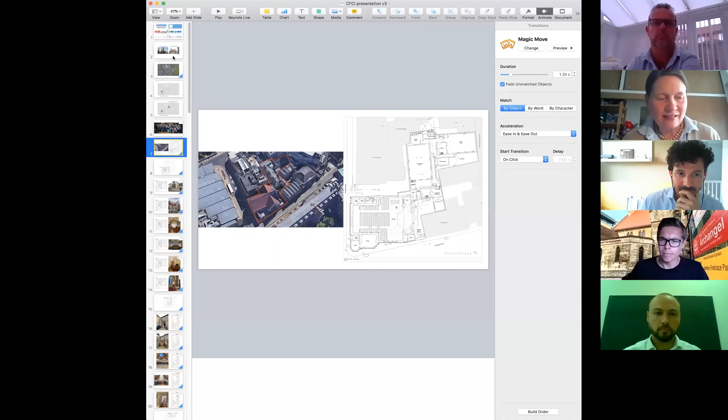Hello, everybody. On behalf of the church building group, I'll highlight 3 aims we've had in mind. The first is a large worship area. We wanted to open this existing area to more people and to consider flexible uses during the week, as well as Sundays. Second is our entrances. We wanted more welcoming spaces, again, both for the church and for weekday community use. And the third point is about sustainability.

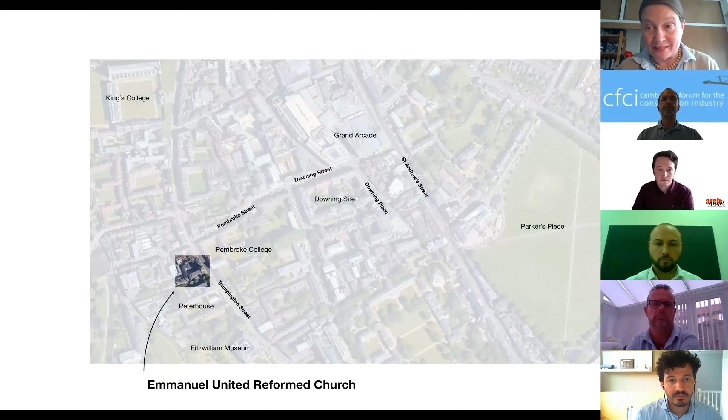First, some background. The redevelopment of the Downing Place United Reformed Church was enabled by the uniting of 2 churches and the selling of one site, that of Emmanuel on Trumpington Street, to Pembroke College. This gave us both the people, and we have 200 members, and the funds to redevelop the other site, formerly St. Columba's, in Downing Place. Pembroke also allowed us to stay in the Emmanuel site for 2 years after the sale during the renovations.

Now, Emmanuel already had the experience of removing the pews in 1991 so that the worship space could be used flexibly 7 days a week, including for weekly concerts. The Downing Place site, which Jack's very conveniently showing here, is opposite John Lewis and has a different community on its doorstep. In fact, it's right on the interface of the university and really busy shopping streets.

St. Columba's had 2 halls that were heavily used, plus the group therapy center, which is now NHS commissioned, all together hosting over 1,000 people a week. The St. Columba's worship area, though, was used only on Sundays and for occasional funerals and concerts. It's quite a striking place and little known.

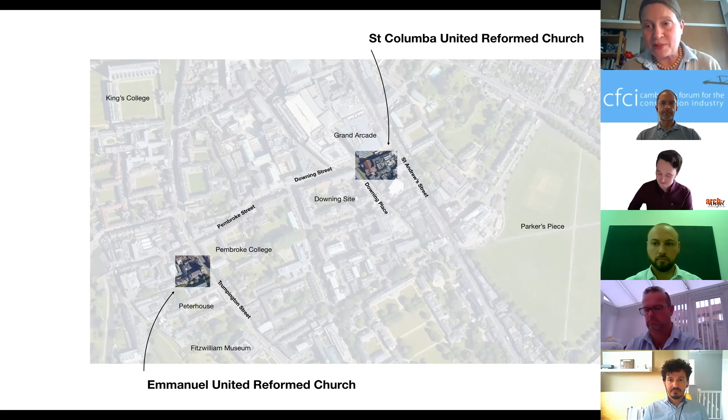So our brief was simple, just update the site for 2050. For worship, we needed this flexible, subdividable sanctuary with a welcoming entrance and including disabled access. For music and concerts, we needed a new digital organ, and we needed to be able to move the grand piano to and from center stage. We needed a catering kitchen for coffee hours and meals, plus a welcoming reception base capable of overseeing the entire site. For community use, we needed small meeting rooms clustered around an open hub, between these two larger meeting spaces. And everything is to have state-of-the-art audiovisual.

Sustainability was another goal right from the start. Because much of the halls and roof have been rebuilt, we've been able to add insulation, low energy windows and doors, as well as roof lights to provide daylight, solar screening, and ventilation in hot weather.

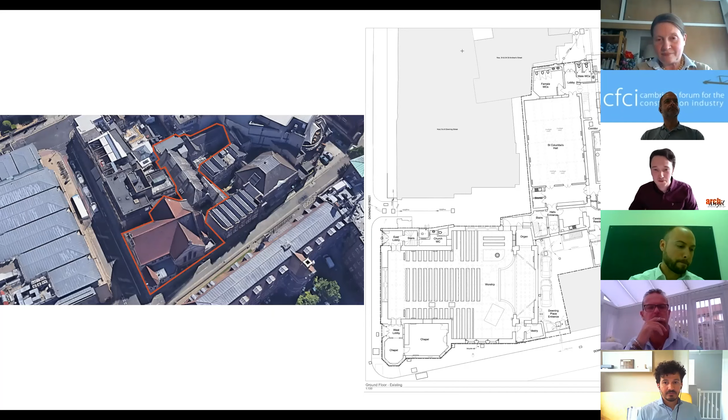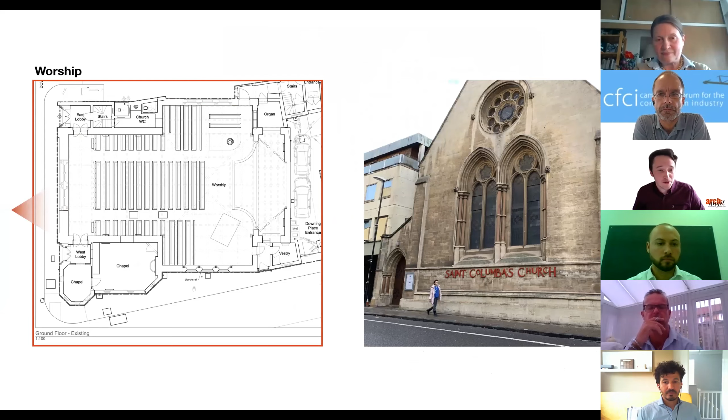The building is not listed. It was constructed in 1890, but it does sit within the Cambridge City Historic Core Conservation Area. We had a positive engagement with a pre-application planning process on this one, and ongoing consultation with the conservation officer throughout the job so far.

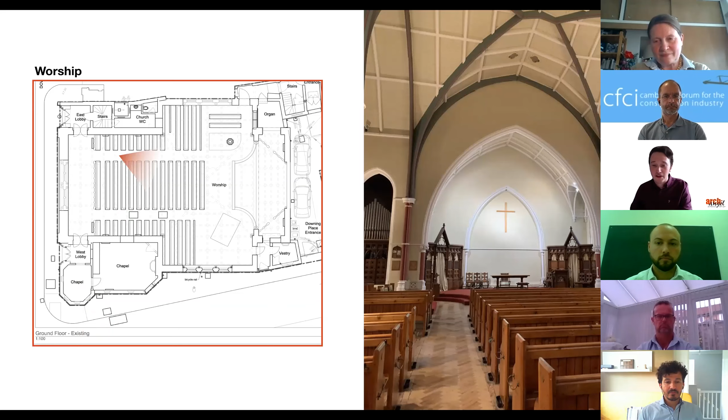We're going to move into the main worship space. As Margaret says, it has a lovely character of its own, and that's retained as much as we're able to do, and what we're changing we'll show you, come on to that later. As Margaret said, it hosts church services, Sundays, midweek, but also funerals, weddings, and some children's activities and student groups—that's how this space is used. But some of the features of the space do get in the way of that being used most efficiently. One of those things being pews, which is something we come across a lot in our work with churches.

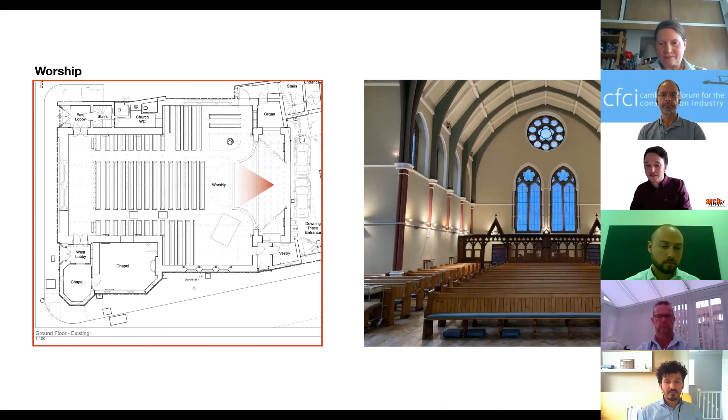The main worship space also has some smaller side chapels. These are used for smaller prayer meetings, and as Margaret said, the Nightlight Service, which runs out of there, caters to people who have been in the pubs and clubs, had a few too many to drink, and they're offered a space to come and sober up and be given some care, whether that be ordering a taxi or just someone to talk to. This space also at the moment, or did, host some anonymous groups as well, counselling groups.

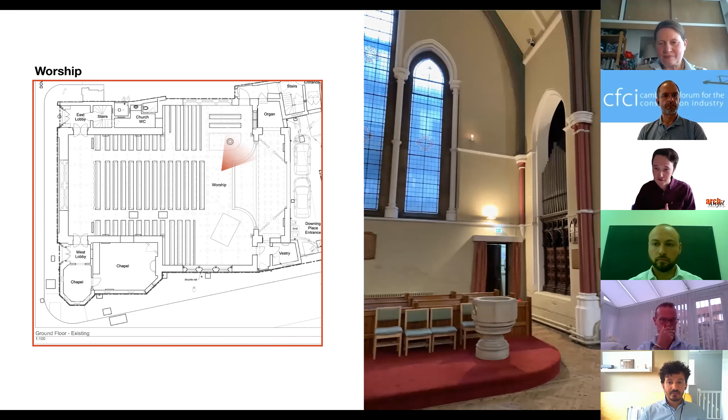Then just looking into the corner of the church, and this highlights one of the main issues we were trying to address in the scheme: the connection between the worship space and the rest of the halls, which was only through that small door there and a small corridor around the back of the organ. You'll see later on how we've tried to address that link.

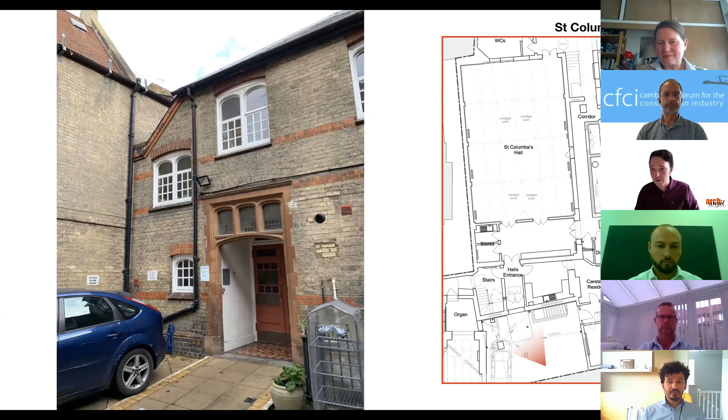So onto the St Columba Hall. This building was a later addition. It has a large hall, WC, offices, and it also has a Caretaker's Flat, you can see on the bottom right. That's nearest the road and the noisier part of the site, which is again something that we looked to address in the scheme. That's just a view of the Caretaker's residence entrance.

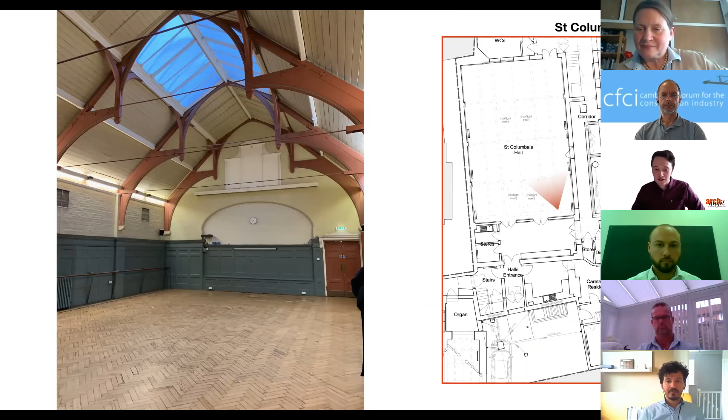This is the view inside St Columba's Hall, and this is used for a variety of things: dance classes, ballet, contemporary dance, yoga classes, martial arts group, and also an Islamic Student Society uses the space for events as well. This is another view looking back towards the main street.

And one of the key problems, and I think this photo highlights it, is that this building was a rabbit warren. It really was difficult to navigate around to know where you were at any given point, and that's another item that we wanted to address with the proposal.

Just through the doors on the left is a small conservatory that sits within a courtyard, which was used for some more anonymous groups, Alcoholics Anonymous being one of many that took place out of that room.

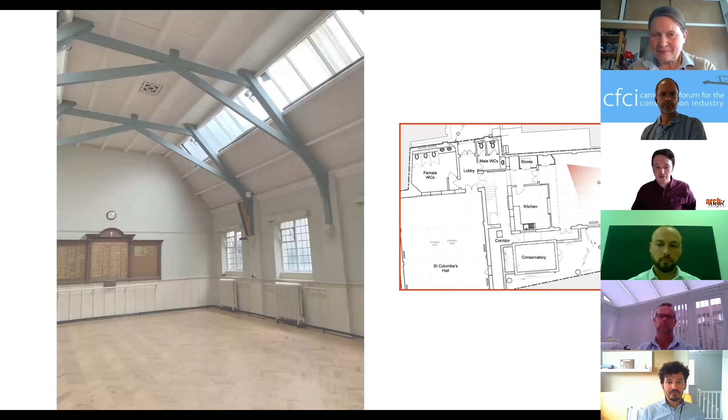And then the third element of the building is the Gibson Hall, which sits in the deepest part of the plan away from the street. It's another large open space. Dance classes were happening here: ballet, tap, swing dance, also a Tai Chi club. This was also used for a monthly lunch club that the church does, providing meals from the adjacent kitchen for a wide variety of people.

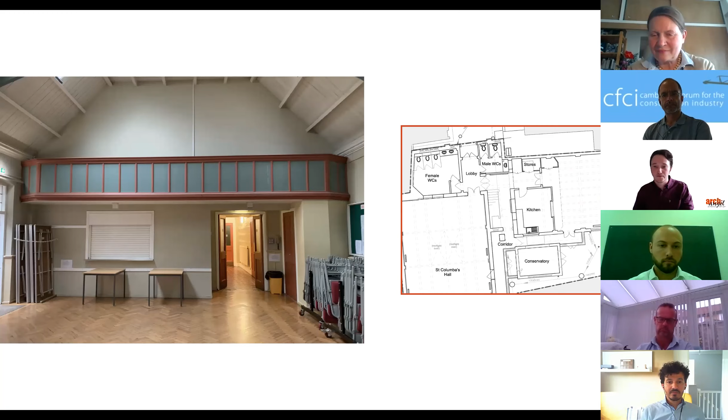And then this is looking back towards the main part of the building. At first floor, we'll come to it in a minute, there are some further rooms. And then this is just a view into the kitchen, to give you an idea of what there is, but hopefully the before and after that I'll come to next shows how we've opened up this space.

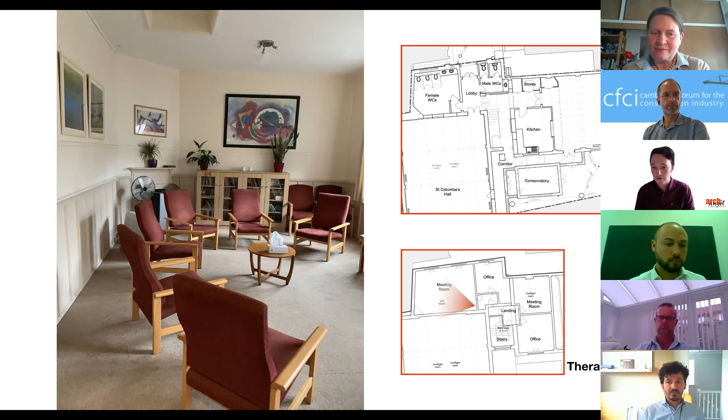And then, as I said earlier, here's the conservatory and courtyard space adjacent to the Gibson Hall. That will become a key point in our scheme. And just briefly, at first floor above the Gibson Hall, there's also a suite of meeting rooms and offices for a therapy centre that Margaret mentioned. So that was something important to be retained in our proposal.

So some of the key aims for the building, as we now come to look at the proposal, we've got 3 examples of change. The first is that the worshipping community are outward facing in their approach. They want to be inclusive and have a very good history of doing that in their activities. But their buildings, as you've hopefully seen, are inward looking. They only have 2 elevations onto the street, so it's very difficult for people to know what's going on inside. That's one of the things we wanted to change, to make the buildings more outward looking.

Second thing we wanted to change was the interconnection of spaces. There's a separation in the plan between the worship space in the bottom left and the hub and the Gibson Hall, St Columba Hall spaces. That's where a lot of activity is happening, but the physical connection between the two was very difficult, and that goes against the church's aims of being welcoming to everyone that comes into their building. It seems like there was a divide between the worship space and everything else.

And then the third thing we wanted to address was providing a better suite of spaces to suit the activities that happen within them. They felt they had too many large spaces and could do with a suite of rooms that were smaller, catering for a greater number of smaller meeting rooms.

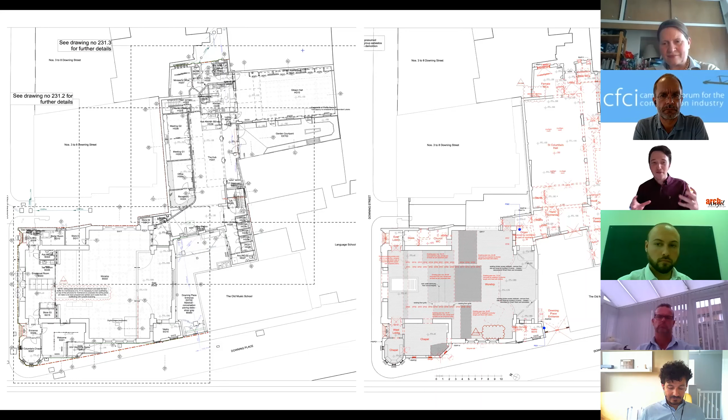So the additions we've made will come through the scheme now. This is a proposed plan on the left and a demolition plan, where you can see that most of the St Columba Hall and Gibson Hall has been reconfigured, and then I'll go through the changes to the rest of the building now. We're going to do that through the use of our 3D model. We model everything in 3D through BIM software called ArchiCAD, from the outset of the design stage, to help with the coordination of all the design stages. So we're going to go through our 3D model now.

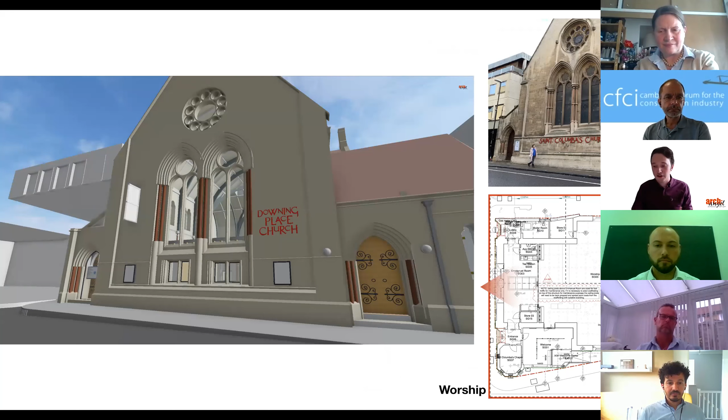And then also on the left-hand side of this image, you may not be able to see it in great detail, but we're creating a shop window, moving some existing doors slightly further back to create space for a TV screen that can advertise events going on in the church.

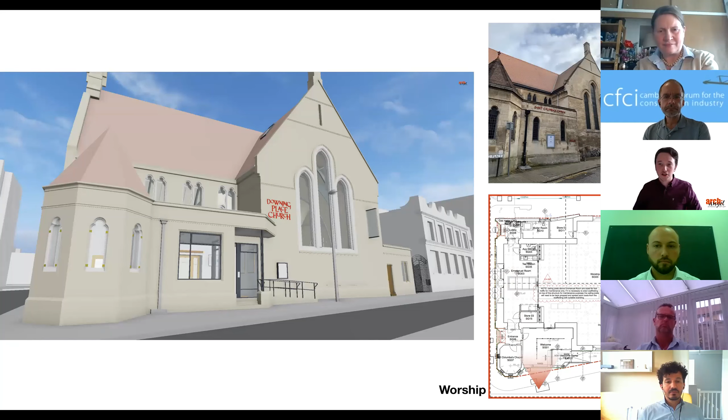Another key change we're making is providing a new entrance. You can see a before and after here. We're creating a new entrance into what was the chapel space, and the idea is to provide a welcoming space that's light, open, and enables people to see in to what's going on in the building.

This is a view from the chapel space, which now becomes that welcoming entrance.

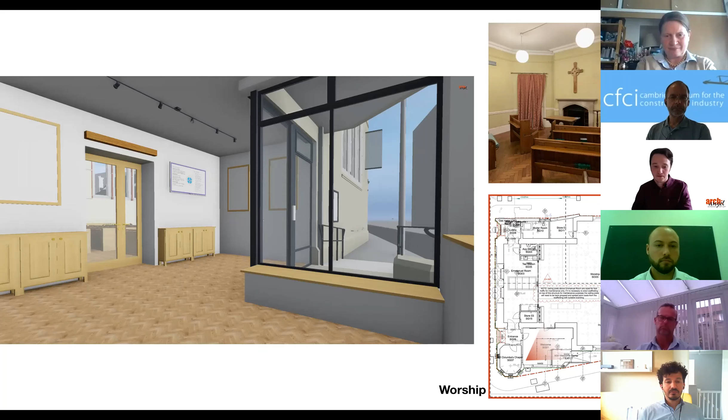Within the church, I think Margaret's covered what the church wanted to do here. They wanted to make it fit for contemporary use, flexible contemporary use. So a full upgrade of the AV and lighting system, and just simple decorations. We didn't want to detract from the character of the space, although you will see some roof lights at high level there, and we'll come on to those later, but that's another key change in this space.

We also, in terms of providing visible activity within the church, have put in a room across the back of the main worship space, which is divisible by a movable glass partition, which you can see stacked on the left-hand side of this image, reusing some of the existing timber screens in front to retain some of the character of the existing building. The idea is that we bring visible activity right up to those new windows on the Downing Street elevation.

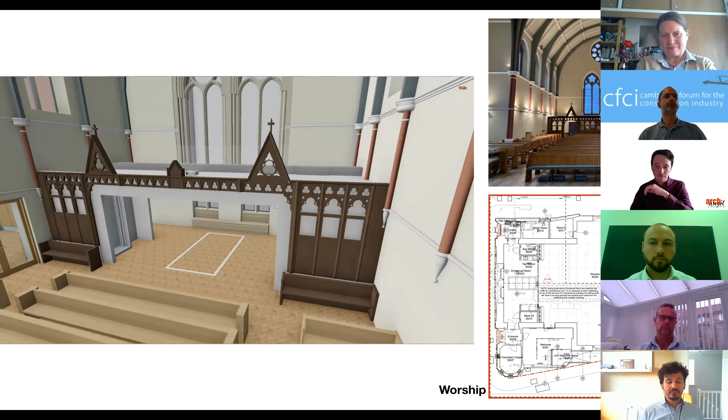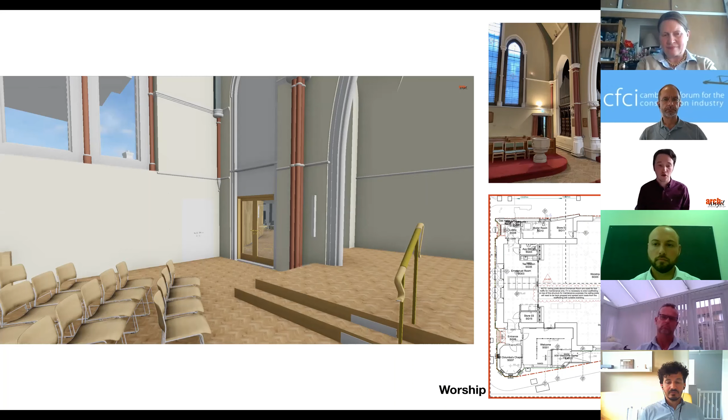And then, looking at the connection between the worship space and everything else, we removed the organ and did some structural alterations to take away a corner of the building to allow a better flow between the worship space and what was the St Columba Hall, now looking at the St Columba Hall, which has been retermed the hub.

This is where we've done the most additional works and alterations: the addition of a mezzanine floor into the hub, into the St Columba space, to create the hub, and a reconfiguring of where functions happen on the plan. So what was the Caretakers Flat now becomes a suite of toilets and the main circulation route, stairs and lift for the building.

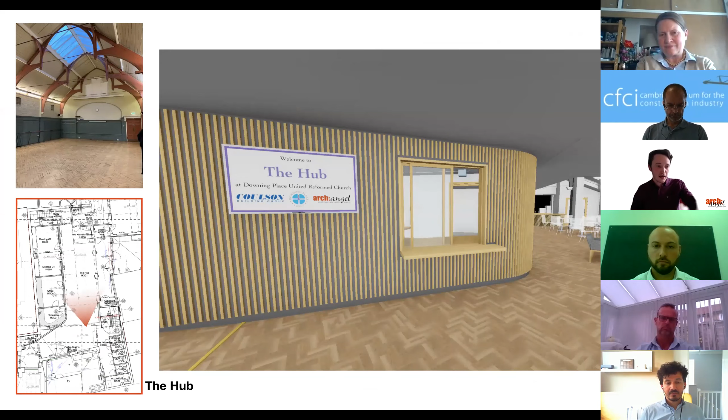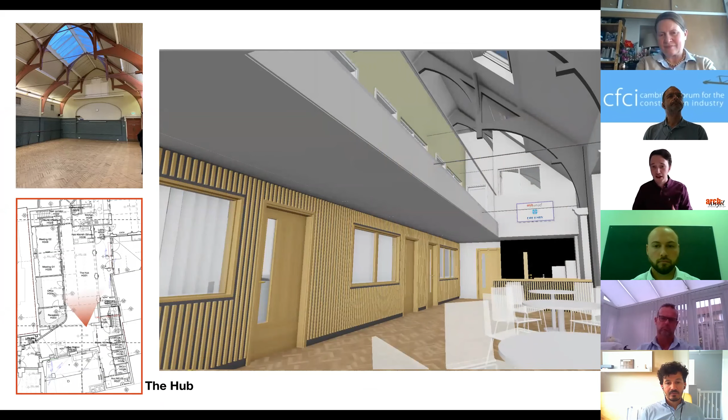So that becomes the entrance to the hub. That's just the same 3D view showing the divisions of meeting rooms. And this is the before and after of the hub, showing that we've added meeting rooms at ground floor - you can see them on the left of the plan - and office spaces, and then an open plan hub space that will be used for tea and coffee after the service, but also as a meeting point for anyone coming into the various uses of the building.

Another view looking back, again, of before and after. And again, opening up of the corridor spaces. The conservatory on the top left, or that corridor we had, we've taken that down, and actually this is the only part of extension on the project, just extending slightly further out to better address the courtyard, and demolition of that conservatory building as well.

As you can see, throughout the scheme, there's lots of use of height, natural light, and roof lights throughout.

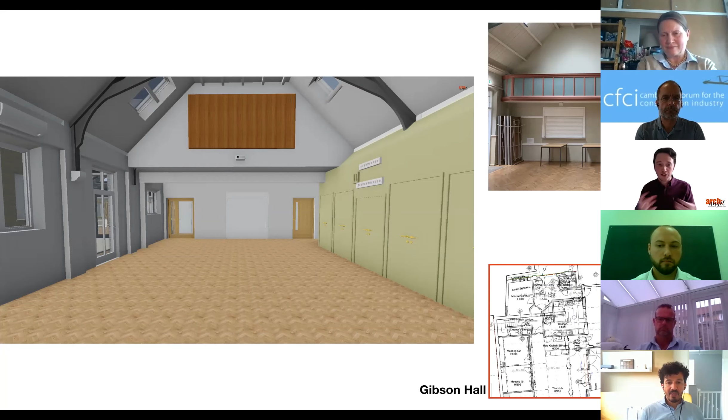And then looking back towards the end of the Gibson Hall, you can see how we've actually pushed the kitchen back in the plan, which enables the kitchen to serve into both the hub and the Gibson Hall, which was one of the key changes in this, and involved a lot of structural changes.

And that's highlighted by this before and after in the kitchen. Where we were in the kitchen, we've now actually extended the Gibson Hall space to make that more usable, but then, as I said, made the kitchen serve into two different spaces.

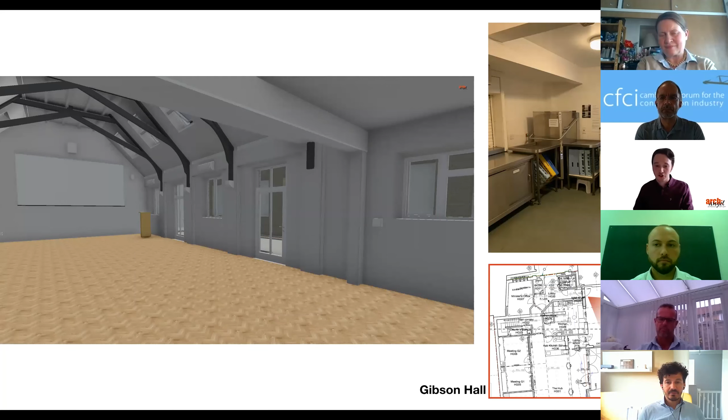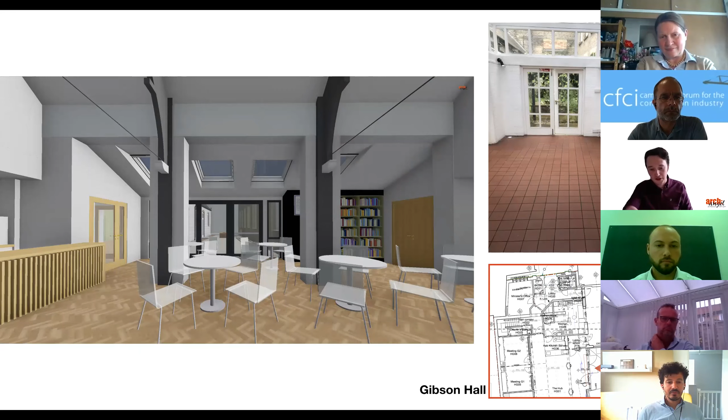I won't dwell too long on the first floor, but we've added a suite of meeting rooms to that mezzanine, and also relocated the therapy centre to the front end of the site.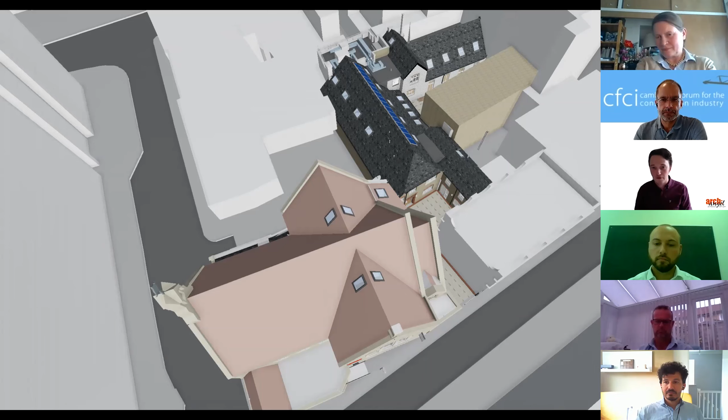That gives you an overview of the changes we've made, and we'll go through some of the other design features as I now hand over to Coulson's to talk us through the build process. One key reason we engaged with Coulson's, in a negotiated contract from a relatively early stage, was driven by the timescales of the sale of Emmanuel to Pembroke. We felt a negotiated contract was a good route because it gave dependable delivery and the contractor's expertise within the design stage. As we developed the technical design for tender, we got input from the contractor on buildability, which I hope has improved the build process for us and for Coulson's. So that's it from me, I'll hand over to Tom and Stuart.

Thanks for that, Jack. We'll now go through the build process. Starting with this aerial shot again, just to remind everyone of the issues we have working in central Cambridge. The first being having 7 neighbouring businesses, which are the Language School, both the Spoons, All Bar One, Wagamama's, the Varsity, Nando's, and Vodka Revs.

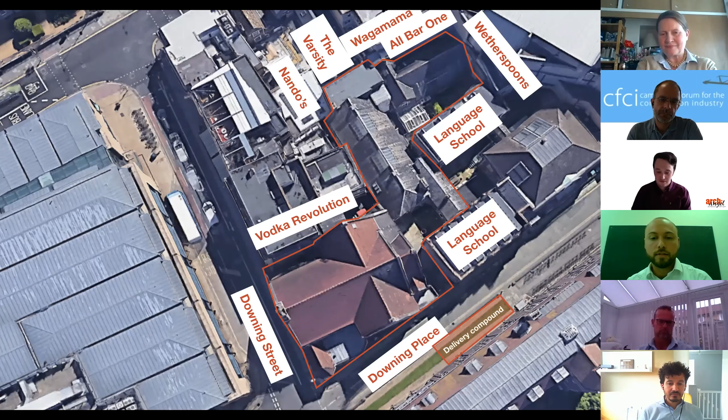With it being in central Cambridge, land is a premium. The church have very good previous experience working with the neighbours and being very accommodating, so we were able to negotiate with Downing College to have a delivery compound set up, and the boxes just appeared like so, which has eased us taking deliveries and moving materials into site.

During the works we've made sure we keep talking to our neighbours with a public liaison officer. The photo on the left is the delivery compound. Within Downing College there's a very sensitive machine the other side of the wall that picks up on vibration and noise, so we put Heras acoustic panels around there to ease the pressure. To the right we have our project notice board, which allows everybody walking past to know what's going on inside the church and what disruption would be caused.

Being at the top of the road, we're obviously going to be blocking it quite a bit to take deliveries, so we set up a delivery schedule where we liaise with our neighbouring businesses, which also allowed anyone who needed to pass down there the ability to know when we're likely to have a delivery truck blocking the road, so they can plan their journeys around it.

As well as getting materials into site, getting materials out is also a bit of a headache. We had a little compound area, made even smaller by putting a scaffold in there as well. We had to go out to several different skip companies to finally find one with a truck small enough to back a lorry in there. As you can see, Cambridge Recycling was successful with this one.

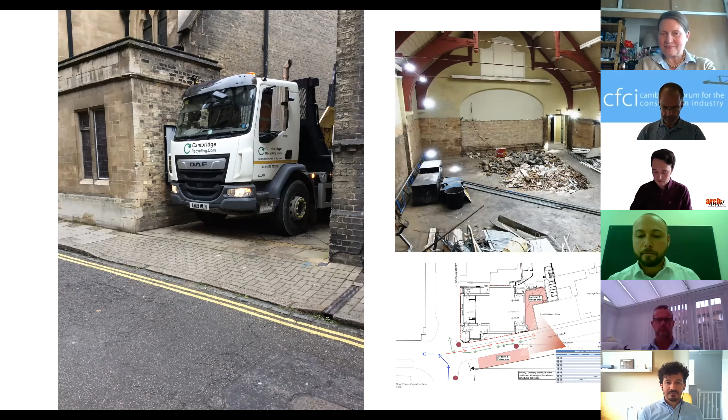But what we did have is an abundance of internal space, so we were able to use the hall, that's St Columba's Hall there, to do site segregation, so all the waste was sent out in the appropriate skip. Next slide.

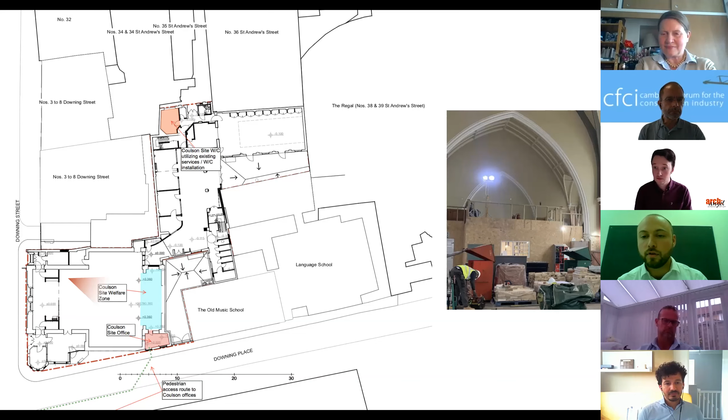Welfare was also something we had to rethink how we were going to deliver, with not much external space, so we decided we would use the inside of the church. The existing dais proved a good location. As you can see in the photo on the right, we had a timber frame hut constructed which had the canteen, a meeting room and the site manager's office, which also had an external door, so everyone can safely enter site without having to go through the building itself.

Thank you, Stuart. Hi, good afternoon everybody, Tom from Coulson speaking. In addition to what everybody said, there's the issue of getting people in and around the site. Clearly we're exposed on two sides to public highways.

We chose to register the contract with the local scheme, the Considerate Contractor scheme based in Cambridge. We work well with these guys, we've worked with them in the past and have a one-to-one relationship with Mr Nick Kendall within there. That gives us the opportunity to pull on that local knowledge and assist us in agreeing and maintaining footpath closures, delivery routes to and from the site, all of which we of course take on and agree through highways.

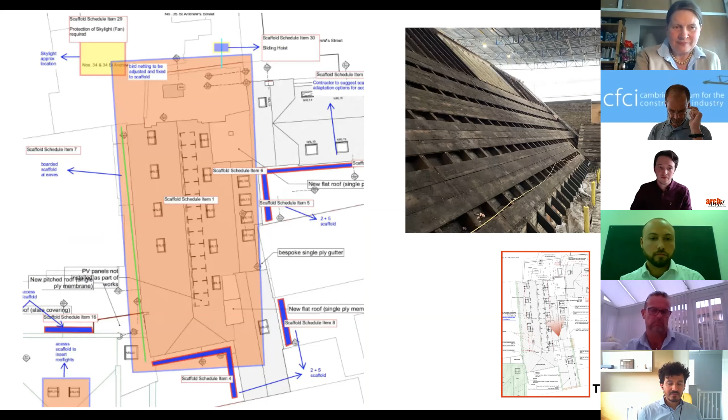Okay, following the erection of the temporary roof, that allows us to actually progress the project. Clearly, on most projects, you start at the top and work your way down. This one is no change there. So one of the first things we did is strip the roof to the Gibson Hall. You can see here the roof is stripped back to its bare bones, nothing but a sarking board and rafter left. That gave us access to removal of the existing roof lights, which have been replaced with modern ones. 28 roof lights in total installed across the scheme.

Removing the existing roof coverings, like you can see here, gives us the ability to improve thermal efficiencies of the building. Margaret's touched on that earlier, so you'll see through later photographs what we've done ensuring we meet that client brief.

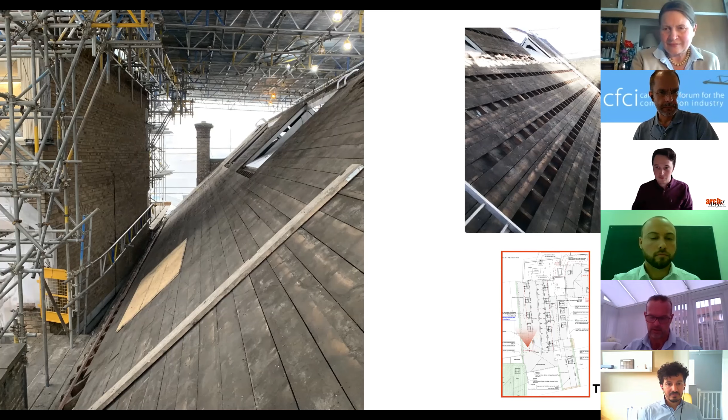This is back to me. This is just highlighting that we had various different roof constructions found, and in one case slightly unexpected. So we had to have a very specific strategy for each type of roof. Some of them needed ventilation, some of them didn't. But in everything that we were trying to achieve, we were looking to go 10% beyond the thermal improvement required by building regs, required by Part L for working with existing buildings. So yeah, this was just highlighting that each roof was treated slightly differently.

To ensure that we got the best thermal performance possible. And while we were doing works to the roofs, as Tom said, introducing roof lights throughout, and also taking the opportunity to install PVs along the St. Columba roof.

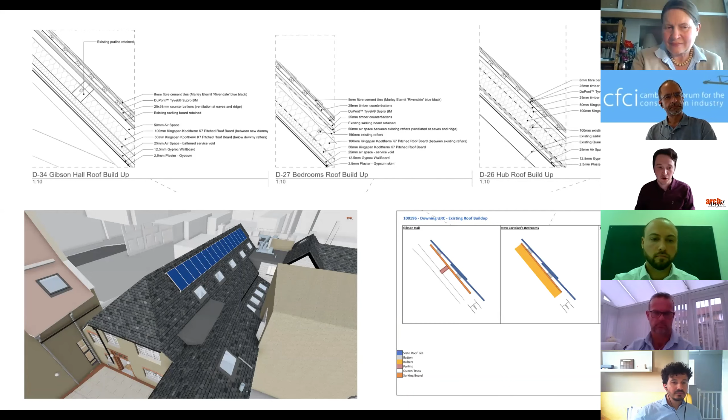And just following on, this slide highlights the strategies that we took. So part of the reason for putting in so many roof lights was not only natural light, but also natural ventilation. Each of the roof lights has rain and CO2 sensors, so they can close automatically when either condition triggers it, but in the main they can be left open to night purge of heat that's built up throughout the day, which was a problem that the client had experienced in the past. So that's the strategy throughout the building.

Thank you, Jack. As we suggested earlier, here we can see the same roof that we previously witnessed stripped. It's now well underway through and being improved. The roof lights you can see positioned here. Note the positioning of them. Two of them had to be raised slightly to allow flashings on those to be considered when abutting existing roofs.

This is the type of detail that unfolds as we deliver these refurbishment projects. You can witness again here the insulation cut between rafter and then another over, all held down with a counter batten. And again, in the top right photograph there, you can see how Coulson's have worked sympathetically with the building.

There's areas of existing lime plaster lath retained there. This is all done in an attempt to ensure that the building is respected and we don't just go in there and take the thing apart, as it were. Thank you.

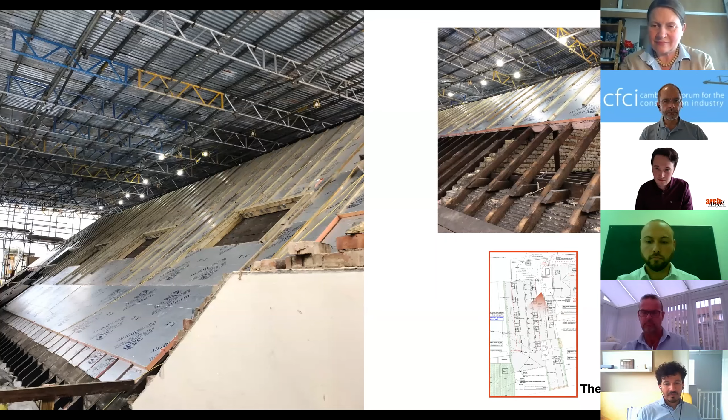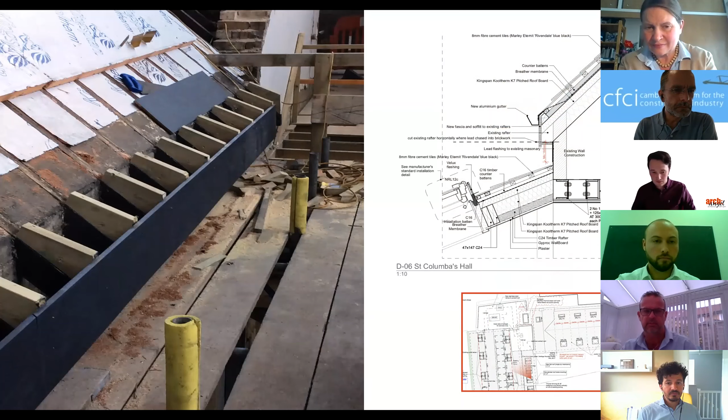As we rebuild these roofs and include the thermal efficiencies, very often that suggests an increase in height. Clearly, if we take things up, existing structures end up being compromised slightly. So here we can witness an extension to rafter feet through the sprocket, a slightly deeper fascia that allows us to incorporate that insulation build-up seamlessly, really, and respects the architectural intent. So that allows us to do what we've got to do.

In addition to that, when working again with these old and historic buildings, there's many abutments that we come across that need some serious consideration. What we're looking at here is a reworked version of the same through Colson's. This particular gutter created no end of problems for the end user prior to our attendance, through regular overflowing and very difficult to maintain. Access really is quite difficult here.

So we removed the gutter in its entirety, reformed it, being compliant through lead code in steps and so on, increased the layboard up the roof to mitigate the overflow, and we've incorporated an overflow system within that gutter, so the site will get witness of a potential block in the main gutter prior to water penetration into the hall.

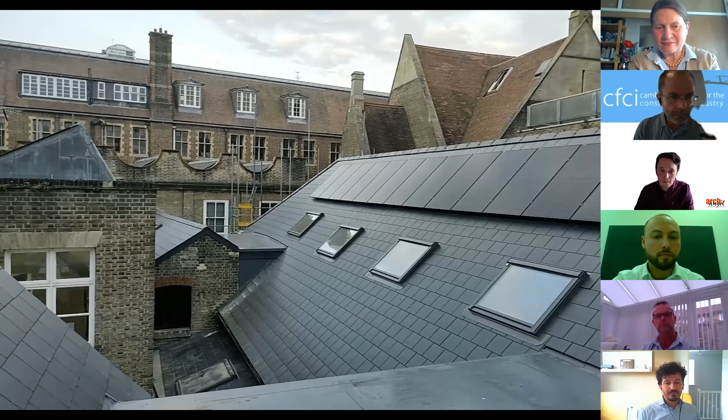This is a picture taken only a couple of weeks ago, showing a temporary roof that's now been struck, and obviously we're left with the solar panels, all the roof lights, the new slated roof, and the merge of some recently installed flat roofs as well.

Once a roof is completed and stripped, we take some of the load off the building. Once we've stripped the roof, that allows us to consider the many structural alterations that are needed.

Jack put up a plan earlier on with several areas of red within it. All of that is demolition. And what we're starting to see here is the progression of the demolition through the scheme.

Several high-level windows have been opened up. You can see three to the right of this photograph. They were high-level windows - we've basically removed them, made them slightly wider through large metal steelworks, and then opened them up in their entirety to get that natural light back into the building.

Back in the far left-hand side, you can see another pair of steels there. That's an entire corner removal, which does take an element of skill, that's for sure. On to the next one, Jack.

This just highlights the other end of the hub hall, really, as we're about to open up the first floor structure to connect the therapy area and the new lift into what will be the hub zone.

Next slide. And then this is in the Gibson Hall. This was a bit of a complex rework, really, for raising the floor.

We had to do a cantilever mezzanine structure in this section, as there was a basement beneath where, if we were to put normal foundations in, it would be quite large, which would mean digging a 2.3 metre deep hole in the existing building - quite challenging.

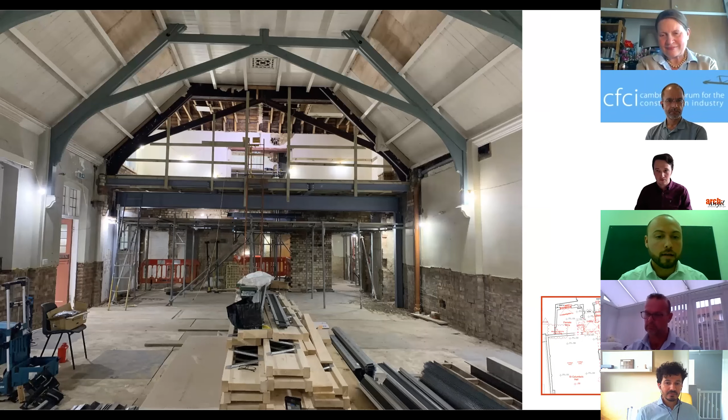Next slide. Here again, more steelwork - there is plenty in this particular project. What we're looking at here is the progression of the mezzanine structure within the Columba's Hall. Interestingly, this structure is completely independent, with some strategically placed columns that are later concealed within walling, foundations underneath breaking through the existing structure onto a pad foundation, and then a simple timber joist infill between.

All this work was done with the use of MEWPs, so there was no risk of fall. Everything was erected and the timber joists were installed using mobile elevated working platforms, as it were.

To the right, you can see a nice photo there illustrating quite nicely Jack's 3D model. And this 3D model really has been very useful, certainly at site level for the site managers. They're able to witness and appreciate the intent, which is often very difficult when you're looking at things 2D in a large open space. So that 3D model for us here at Colson's, we can't praise enough - it really has been very, very useful.

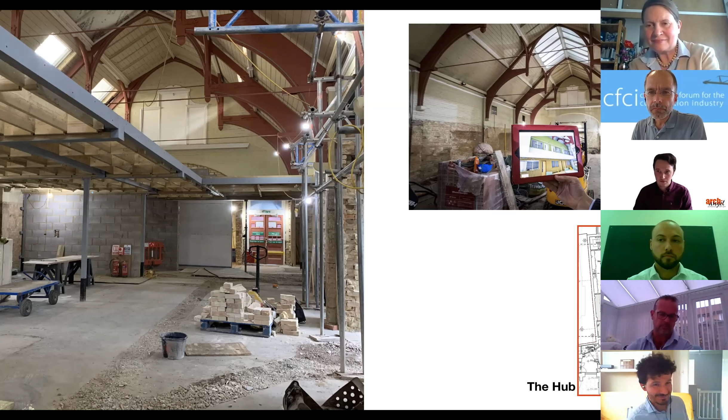We're a bit worried about the steadiness of that whilst we took the roof out, and it being an unsupported roof structure. So in turn, we decided we would install the new roof first. As you can see, the joists have gone in there, and then we put the ply deck on, which in turn acted as a bit of a crash deck, as well as keeping the site nice and secure and the elements out whilst we took the roof off.

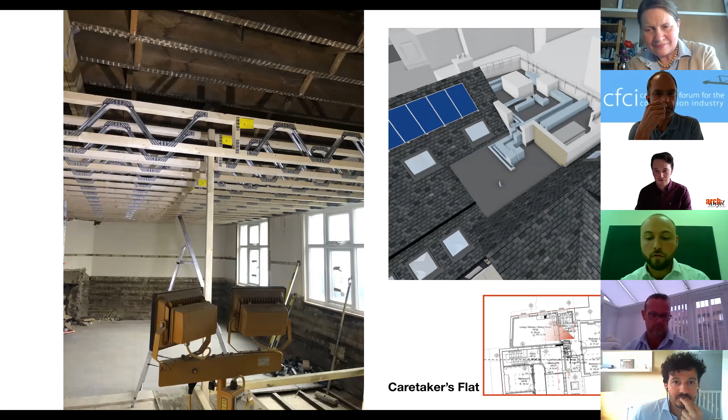So, as Stuart mentioned, lots of plant placed on a flat roof, and we then had to, at design stage, work out how to feed that plant throughout the building. We've basically identified a longitudinal route all the way along the spine of the building at two levels.

This is showing ventilation coming in from the flat roof behind us, going through at high level, carrying on above the first floor meeting rooms, and branching off to the right, then dropping down through the first floor meeting rooms to get to the ground floor meeting rooms. This was something we worked on at design stage, making use of the BIM model with our services engineer to identify those routes to service the building.

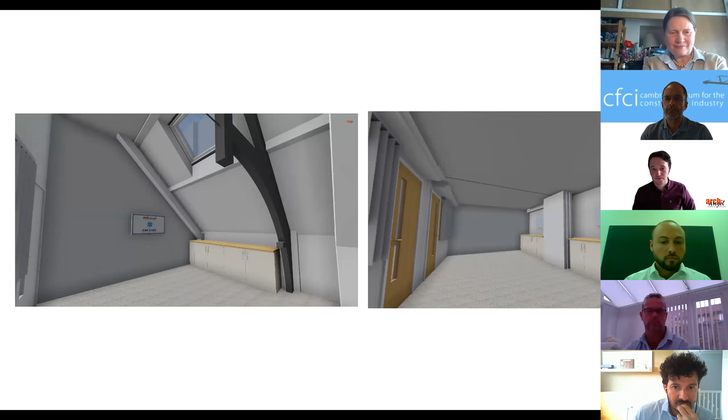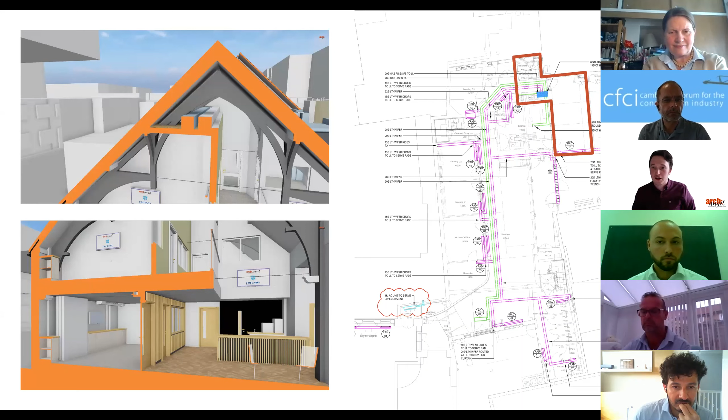This is another slide that represents the same thing. You can see in red the plant area that Stuart was talking about, which feeds the rest of the building through a riser identified in blue. The pink and green basically show the service routes we've taken, going all the way along the spine of the building, which runs at both first floor ceiling level and second floor ceiling level. Which brings us to where we are in the hub now.

Yeah, indeed, thank you Jack. What we're witnessing here is exactly one of these primary service routes. This one runs front to back of the building, and you can see the high level containment for electric, data, AV, fire alarm.

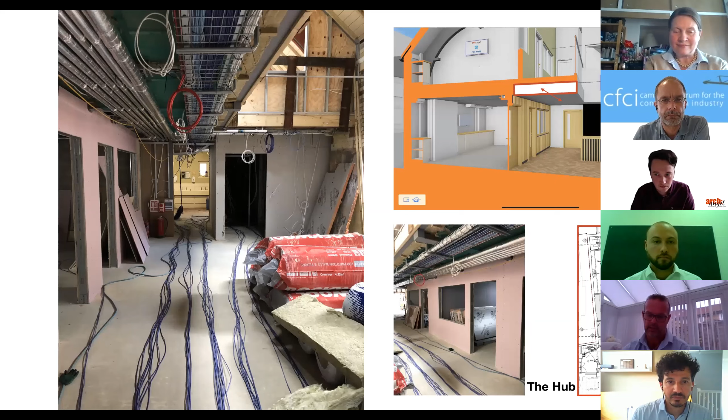Next one, Jack. So we've just jumped straight up above to the first floor now, where we can see the meeting rooms starting to be built. These walls are acoustic walls, and they also run slightly higher than the ceiling will be, so they mask the ventilation ducts that run across, while still maintaining the nice structure of the existing roof. We can see also in this photo how the light is going to work, making a nice light, airy space between the ground and first floor areas.

What we also wanted to pick on is the existing ties. On the right hand side within the Queen Truss, you can see there's a light grey scar - that's where the tie used to run. As you can see, that would have been right in the way of the walkways and meeting rooms. So we've actually lowered this tie down, using the existing steel and the new steel frame structure we put in, connecting to the existing piers we've now formed.

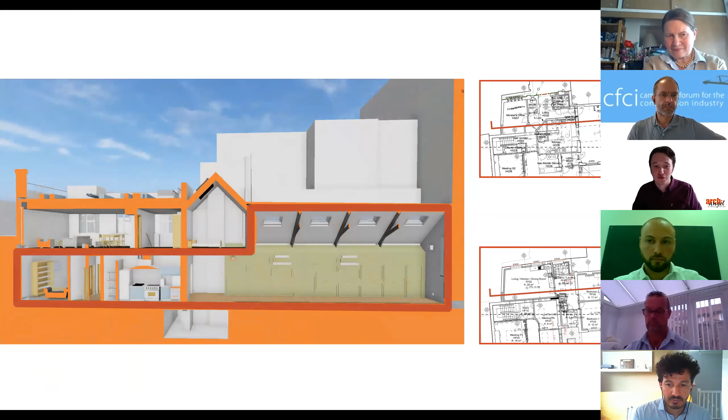I guess, over to, I think it's Tom. Yes, indeed, thank you Jack. So as Jack has suggested there, we can witness the progression of the acoustic floor, and clearly the acoustic flooring is quite important when we're working above a commercial space. So a Gyproc silent floor system was specified.

In addition to that, picking up on the thermal efficiencies that Margaret requested through the brief, you can see again in the domestic part of the building, we've improved the thermal efficiencies of the building with the wall boarding you can witness on the right-hand side.

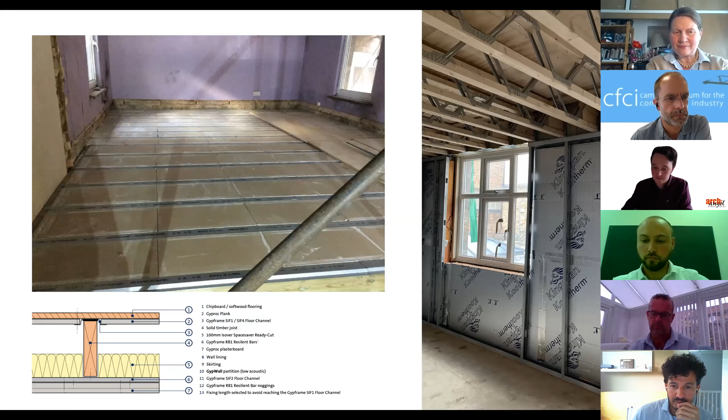Next, we come over to probably the tightest area of the project. This is the lift and stairwell, within the central core of the building, the circulation area if you like. It really is very, very tight, working with the restraints of an existing building, having to get compliant requirements in. Stairs have to be a minimum width to service a certain amount of people, and likewise with the lift, those restraints set limits we have to work with. The stair and the lift was particularly challenging on this one, but I believe we're there.

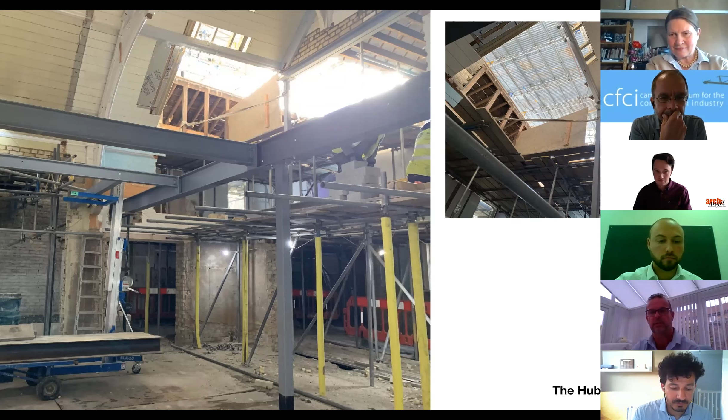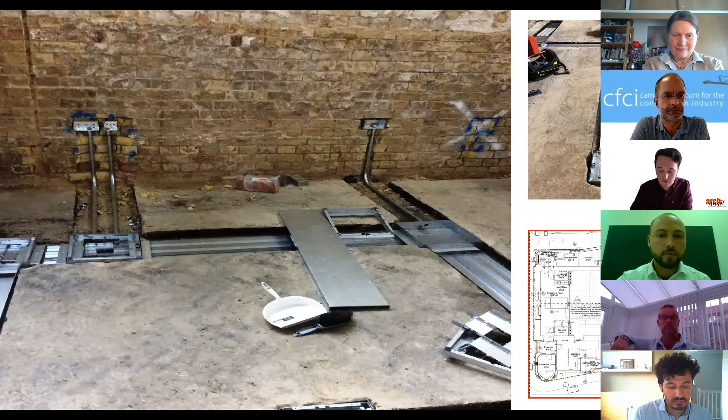We're now just going to touch on a few areas of improvements within the church itself. We've installed lots of floor containment to allow services to pass around the church. Interestingly, this containment only needs a 70mm deep trench, and it's 3 compartmental segregation with that.

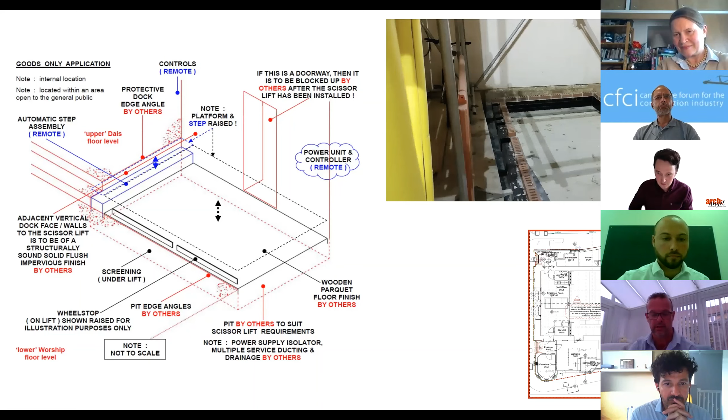And a drawing confirming how this thing will be installed. That will quite simply allow the piano to be slid onto a deck, which will be finished identical to the floor, and then through operation that lift will raise it to the dais height, allowing 2-3 individuals just to maneuver the piano into the center of the dais.

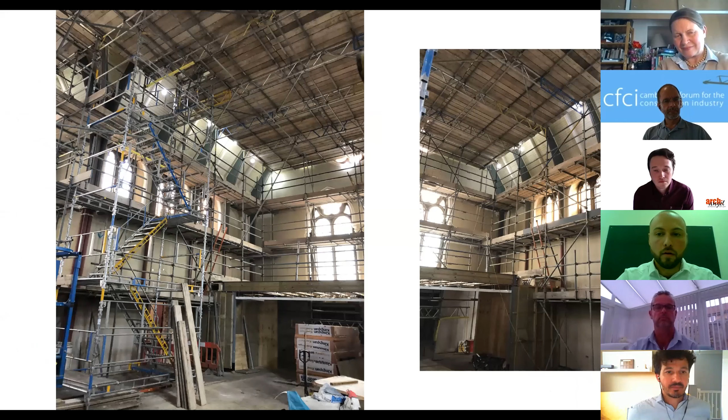To allow us to safely complete the works within the church, we worked with our scaffolders to design a scaffolding run around the perimeter, allowing us still to have the internal floor space. We then did ladder beams across the top to create a platform to work within the high-level roof space, which will allow us to do all the electrics, AV and full decorations, as well as the roof lights and blown insulation.

Just a couple of photos here, really to see the craftsmanship from 1890. As you can see, they used trees to support the roof back then, large, very large timbers up there.

I think this is back to me, just to summarise where we're going with the main worship space and the key environmental things we wanted to achieve, which is actually a reflection of what we're doing throughout the project. So insulating the roofs to give it a nice warm hat on the building. We've also been doing some damp proofing works to the walls, which we didn't mention, but we've done throughout as well. So that's getting nice dry boots - dry boots, warm hat, to keep everyone safe and dry. There's really important focus on providing natural light, providing ventilation through roof lights, providing secondary glazing, or in some cases in the rest of the building we're providing new windows, triple glazed in some cases, and then also the addition of PV panels.

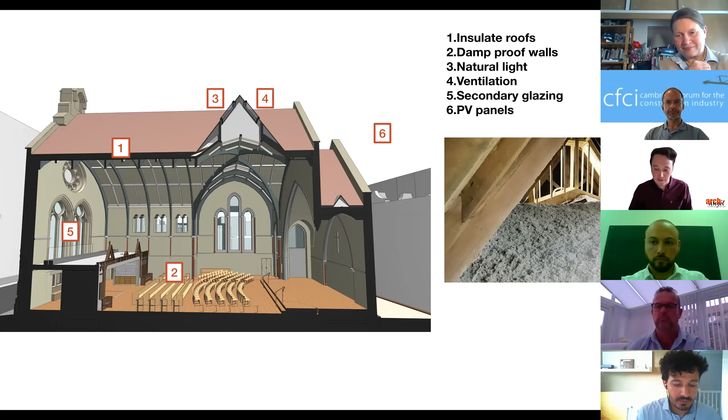The blown insulation to the roof in the image on the right has gone in, into the void space in the loft, and that's a new one for us, something that we think is going to make a big difference in this space, and it shows what is possible with a historic building.

The next phase of work is to open up the new entrance, and there's a real effort here to retain as much existing stonework as possible. Wary that we're running out of time, I think I will say thank you very much, and are there any questions?

Super, everyone, well that's a fantastic tour there. The construction photos, I should say, are absolutely fantastic for our CFCI members to see how all of this stuff goes together, and it's great to see Coulson's giving us a real insight into how some of the ideas that the architect and the team have come to life.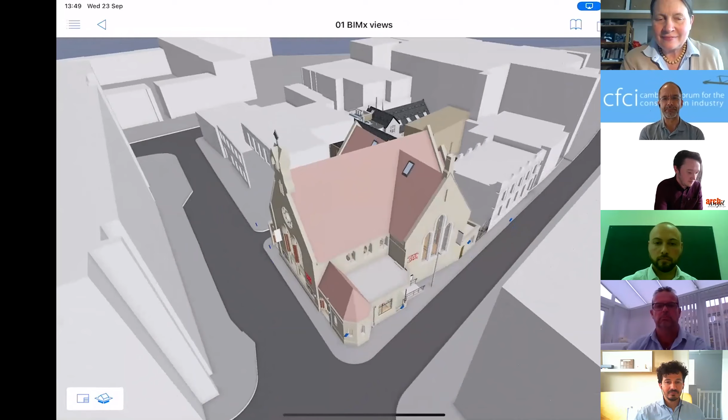I should probably start by saying the challenges of working with an existing building are obviously evident from your talk, and I guess from a climate emergency point of view, we do have to reuse buildings. It just so happens in this instance there was no other option really in terms of conservation, but it does show us how inventive you can be with existing buildings, and perhaps we should all challenge ourselves in terms of the demolition case. But anyway, that's enough of a plea from the CFCI chairman.

So if I can just start directing a few questions to our panelists. It's great to see the 3D modeling of the building, and I've got two questions around that use of 3D. The first question is for Jack and for Margaret: how did the 3D model help the client briefing process, allowing others from the congregation and the client group to understand what was being proposed and fully comprehend how that was embraced? So why don't we answer that one first, Jack, Margaret, or Dirk?

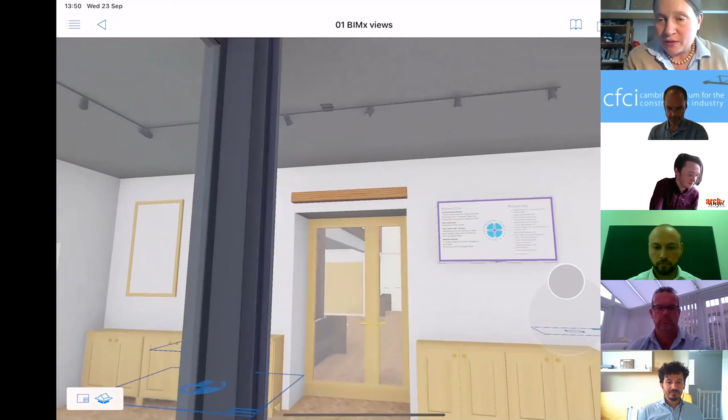I'll start. When we had the big vote to confirm that we wanted to go ahead and agree the funding, we showed Jack's model with a walkthrough, and people were amazed. It was completely clear to people what this huge challenge was and how exciting it was going to be. Right the way through in meetings, we've discussed where the furniture is going to go, what it looks like as you come in, and where the AV panels are going to be. It's absolutely invaluable, and hearty congratulations to Jack - it was really great.

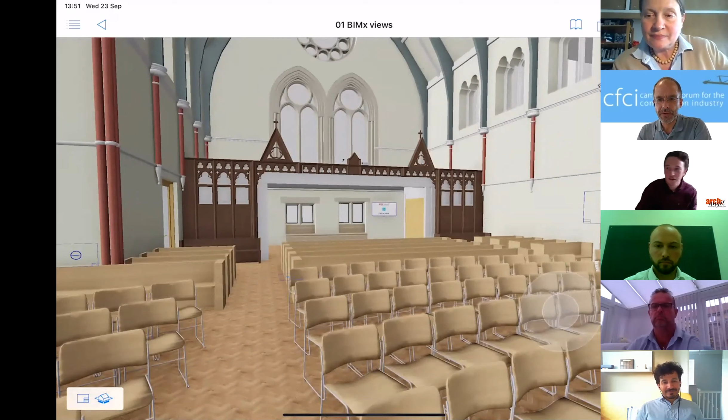Something to add is this model is viewable on mobile devices. I'm running it off an iPad, so it's possible to look at it on site, and we've been able to share it with Coulson's. We can also export it to a basic VR software, the Google Cardboard one, and we did a session with the client group using a VR headset, standing in the space and looking around. It's difficult to show that in a webinar, but it has that functionality. In building group meetings we've run the models too to make decisions - it's useful right through the whole job.

I think it's a super example of how, as a construction industry, we can broaden our reach - bigger picture in terms of making people understand what it is we do, and the vision involved.

Thank you both for that. So my next question is for the Coulson group, Tom and Stuart. As I said at the beginning, the construction photos were really great for us to see, and I love the quote, the needleless propping - I guess nobody else really understands what you mean by that, but it's a great word.

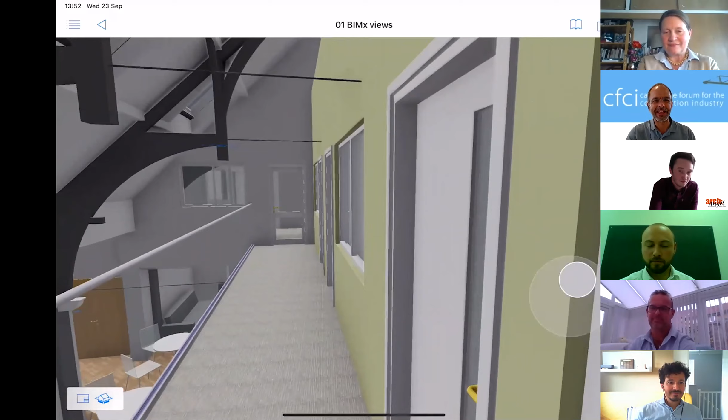On the strategy for construction access, you mentioned there was a sensitive piece of equipment next door in Downing College, in the geology department. So did you upset them with vibration and noise, or did you manage to achieve the considerate contractor points there?

Well, the project as a whole, we've not had a single complaint really. We set up a project-specific email account, noted for anyone passing by if they had any issues, and several of us monitor that. It's empty, so that can only be good news.

Excellent. I guess with seven neighbours, I'm surprised you haven't got any complaints - is there still time yet to get some? I shouldn't say that, should I? There's always still time, Simon, but the public liaison officer we've appointed to the project is regularly communicating with the neighbouring properties, so we can fend off any issues before they become reality. It also allows us to advise neighbouring properties where we are and what we're about to do, so the risk of offence is taken away before the chance is there.

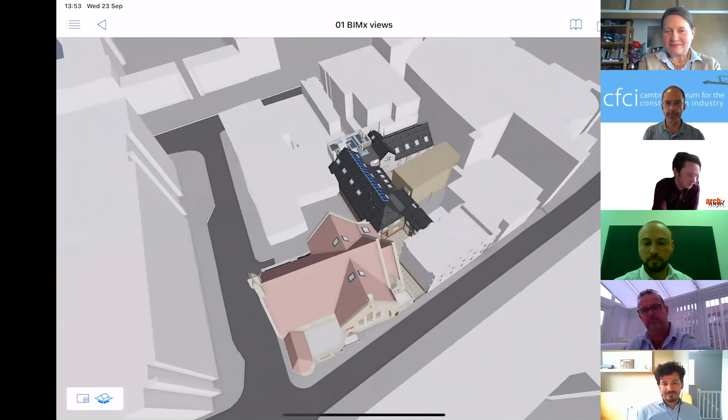Okay, good, thank you everyone. Going back a bit now, a question on the 3D model - how was that produced? Did you do a 3D point cloud survey, or was it all measured by Jack, Apost and Dirk going around making their own measurements? What did you do there, how did you create that?

Apost, do you want to take this one? Everyone's heard enough. Yes, yes.

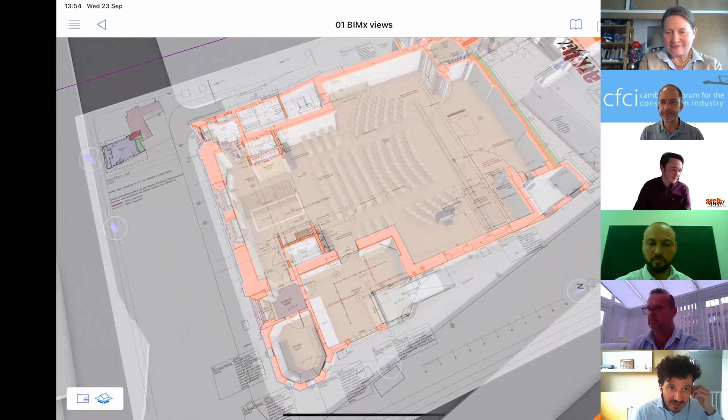So it was a fairly traditional route, I'd guess. The building was surveyed by a surveyor who produced 2D plans, sections and elevations, and we used that to model it with the standard tools provided within CAD software, like walls, slabs, and columns. Through ArchiCAD we get the opportunity to define which elements are retained, demolished, or new, giving flexibility to check how the design affects the building and where you need to incorporate something or not. But it's a fairly simple model building process.

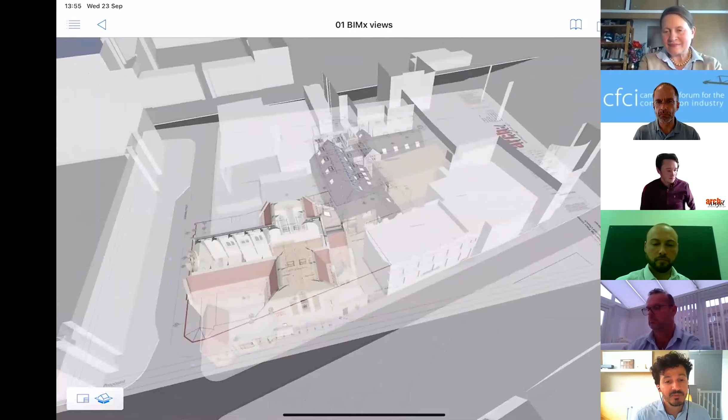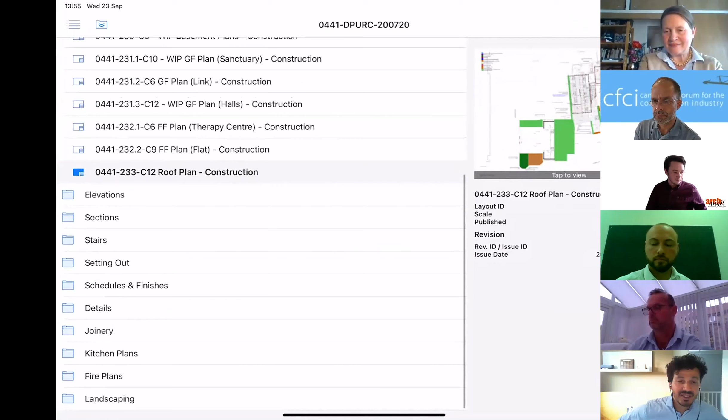The helpful item is that once items are in, production of schedules like furniture schedules, sanitary ware, or room finish data sheets is fairly straightforward and streamlined. So any slight change can easily be reflected in documentation that goes out, which mitigates a bit of risk in communicating changes. Thank you, Apas.

Question here, I think, for Margaret. Was there a tension between the need to remodel spaces to achieve flexibility against the loss of, I guess, a sacred side chapel, which now becomes an entrance? How did you go about making those difficult decisions?

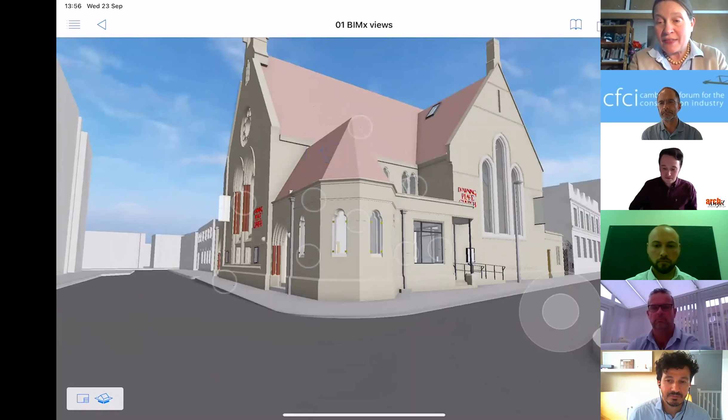For the entrance, it was actually in a meeting - we had a lot of very open, creative meetings. One of the members said, what about coming in through the old chapel? Surely that's the obvious place because it's quieter on Downing Place. So that was not a problem. The pews and all of the carved wood screens - I mean, we're talking about two different congregations.

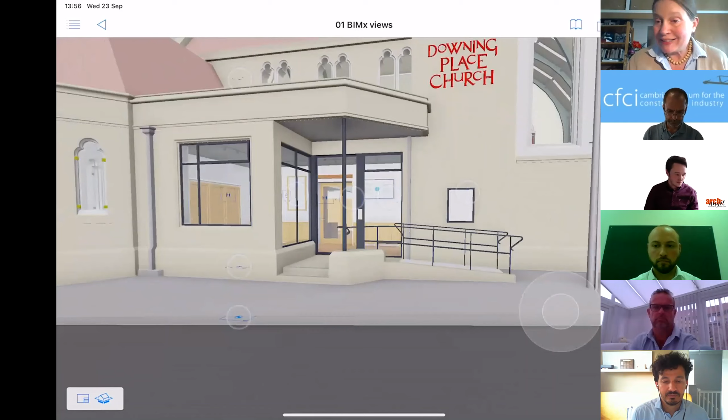Everybody has an opinion, and we simply left it and gave people a lot of time to think and use the 3D model to see what could be. And when we had a vote, it turned out people were prepared to change things. We didn't know until last spring that would happen.

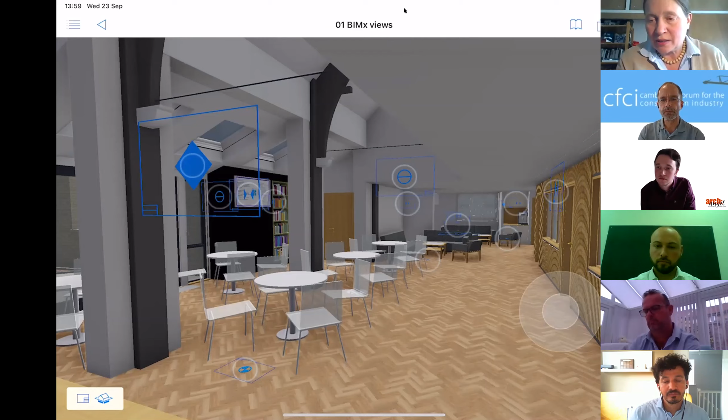From a sustainable point of view, we did hope it might be possible to use heat pump technology. We had no space for boreholes, and it was going to be a problem with noise with all those neighbors. So we do have cooling cassettes - we've got heat pumps in terms of cooling available for really hot weather when there are a lot of people. But that's all we've had to use, gas condensing boilers.

I also want to add that we had really long discussions about whether it would be possible to use air source heat pumps, for example, or any other less emissive mode of heating. It's always an issue with noise, and an issue with heat being expelled out of the units and getting back into the building through the ventilation. It was very difficult to accommodate that in this case. And we weren't able to, for instance, lift the floors and put in underfloor heating. The amount of thermal insulation was good, but couldn't be enormous given the constraints of planning and the existing building structure.

Sorry about that, the doorbell rings, doesn't it, when you're in the middle of things.

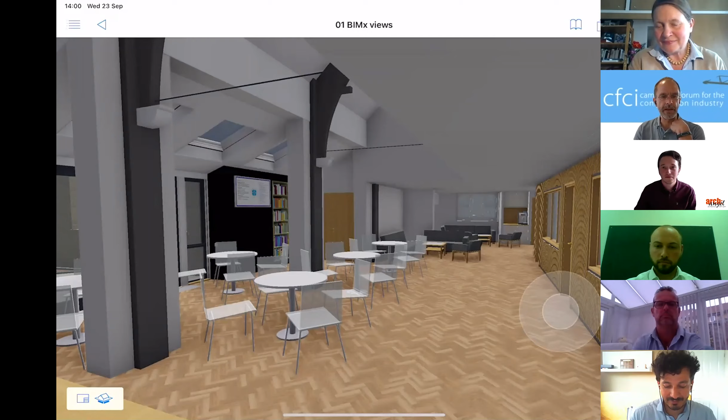I think everybody, that's fantastic. We're at 2 o'clock now, so I'm afraid I'm going to have to wrap this up. But to all of you here today, to Margaret, thank you very much for being involved in the presentation today, and a very aspirational project. To the team at Archangel, fantastic work - I love the work you've done with the 3D modelling, and the aspiration you've had with the building is fantastic. And to Coulson, just some very diligent work on site. Really all very commendable.